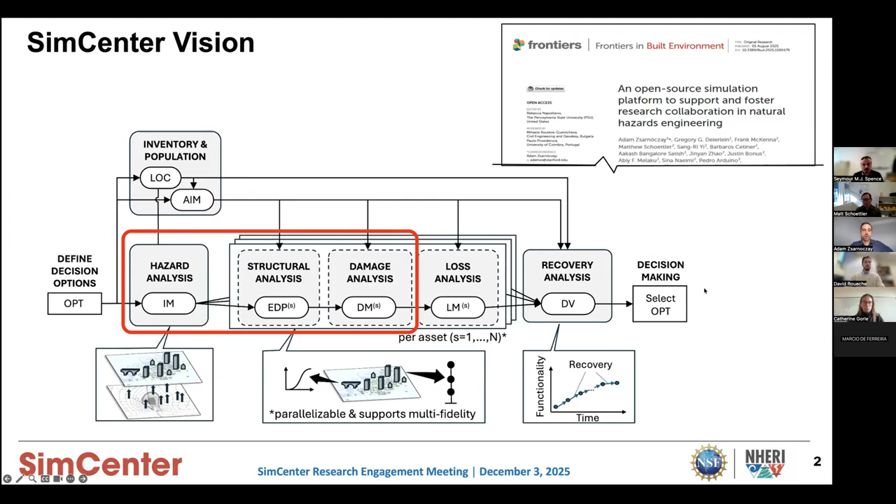So when it comes to this conceptual framework, what we are going to talk about most of the time today is how you can do a hazard description or characterization, then some kind of structural analysis, and in the end, we will also look into damage analysis a little bit. But I want you to understand that there's much more to the SimCenter platform. And if you are interested in these other parts, I encourage you to check out a publication that we had recently and also to talk to us to learn more.

So having this conceptual framework is great, but I think one of the strengths of our simulation platform is that we implemented it in a backend and in several different front-end desktop applications. Our backend is what does the simulations. It's written in C++ and Python, and our front ends are making this accessible to users through graphical user interfaces.

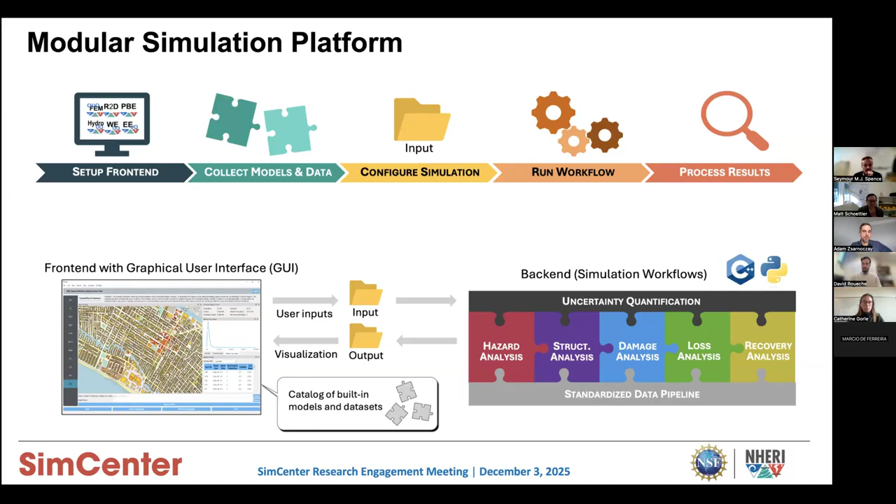We have different front ends for different use cases, and they help you go through the process of running these simulations from the beginning where you just set up the application all the way through configuring the simulation, running the workflow, and then processing and reviewing the results. We provide different levels of complexity for users with different needs. Those who want a streamlined analysis, for example, students who are only getting familiar with wind engineering, have many automations available to them that make it very easy to get something running.

But those who are more like graduate students who want to do research and want to develop new models can go a little deeper, get their hands dirty, and then bring their own models into the platform and make use of the flexibility of this whole architecture and see how their models compare with what was already available, and then make these new models available to the broader community.

We have this complicated figure that I'm not going to go into the details of, but you see that we have figured out how to help users with different needs, and we provide different ways to use our platform for each level. So if you read that publication that I linked earlier, then you will see how this translates into actual use cases, and you will see how it could work for your own research or practical work.

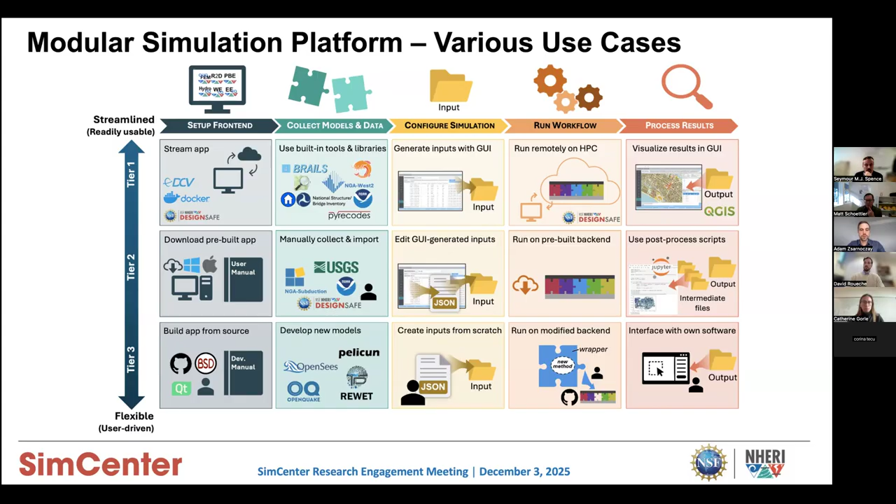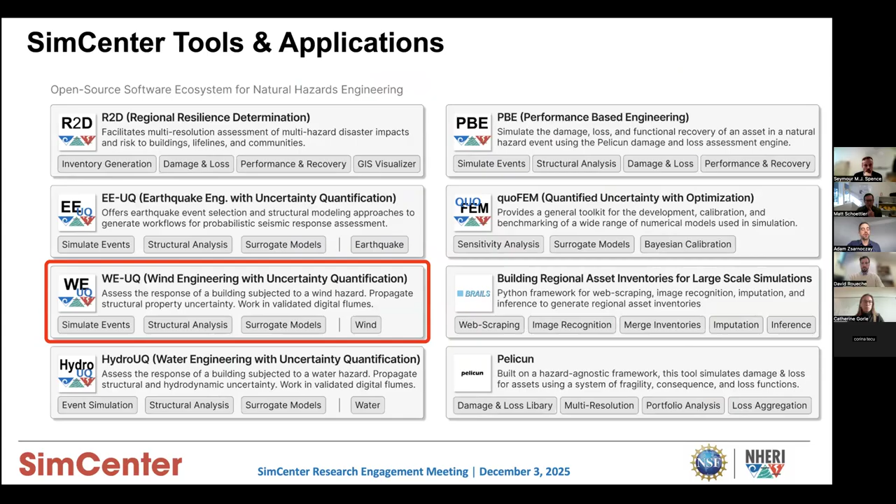Now, when it comes to our desktop applications, we have a different application for each different use case that we identified. I mentioned that earlier. What we will focus on today is WE-UQ, our wind engineering with uncertainty quantification application. I just show this slide to show you that we have other applications for other purposes. So if you are also interested in those kinds of problems, then I encourage you to check out those applications as well.

Now, when it comes to WE-UQ, what we are doing with this is fourfold. First of all, we want to help people get familiar with and we would like to support the education of more wind engineers who are well versed in computational methods. And we envision a new generation of wind engineers who are just as familiar with experimental work as computational methods and use them as complementary tools, and they can get much more done by having these two at their disposal.

Besides computational fluid dynamics based approaches, we also have a bunch of stochastic tools for wind generation and wind pressure generation. And we also support bringing your own experimental data into the tool and using that directly for the calculations. So this covers the wind hazard part. We also have a structural response part in this application. All of our applications give you workflows. So you can step through different modules to get a complicated calculation done with these applications.

So the wind part gives you the wind loading, and then the structural response part allows you to model a structure and apply that wind loading on it, and then see what happens to the structure. We use OpenSees here to model the structural behavior, so it's a finite element method, and we provide a number of different modules that help you create those models and bring existing models into the workflows.

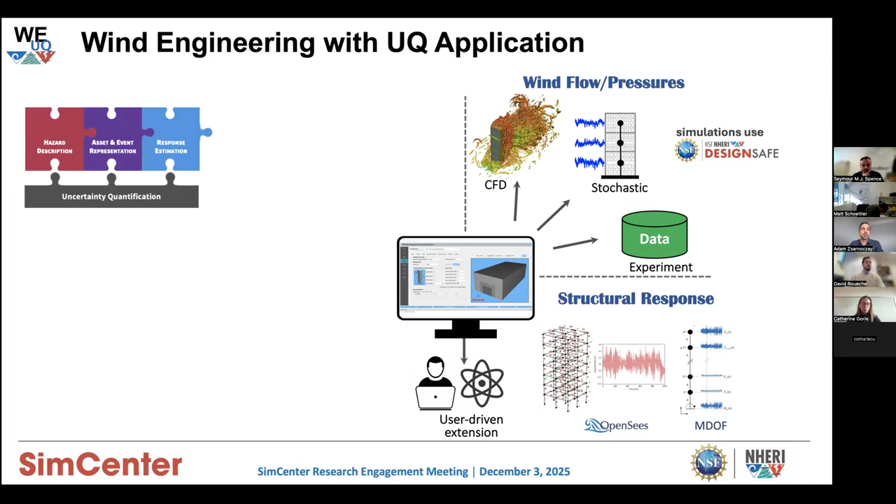Uncertainty quantification is the third part that I wanted to talk about. We don't want these analyses to be just deterministic. We want to help you do probabilistic analysis, either just forward propagating uncertainty or doing more sophisticated things like sensitivity analysis or reliability analysis. All of these are built into the tool and facilitate those kinds of analysis and making them part of your research.

Finally, our most ambitious goal with this is to help you create surrogate models. So once you set up these workflows, you should be able to generate surrogate models that reproduce the expensive calculations and make it much easier to apply the same kind of fidelity to your analysis with a fraction of the computational cost.

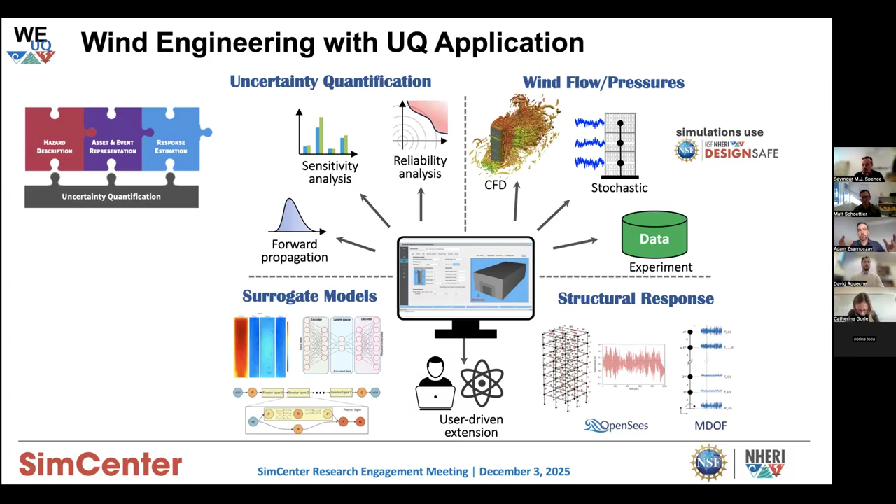So this is what WE-UQ does in a nutshell. And I would like to focus on 4 different use cases next to give you a bit more details about the kind of problems that we see people use WE-UQ for already.

The first one is a relatively simple starting point where people do sensitivity analysis using existing results from aerodynamic databases, such as the database from the Tokyo Polytechnic University. This is bundled with our tool, so you can automatically access those results and then apply uncertainty either on the wind speed or on the structural parameters, and then do a sensitivity analysis to see how that uncertainty translates into the variation in the results.

We have examples for each of these use cases that I'm going to mention. So if you go to the WE-UQ documentation, you can look at those examples where we provide a detailed description and guidance on how to run these problems and what decisions we made when setting up these problems and how you can deviate, what other options you have if you want to run similar problems for your research. So sensitivity analysis is the first.

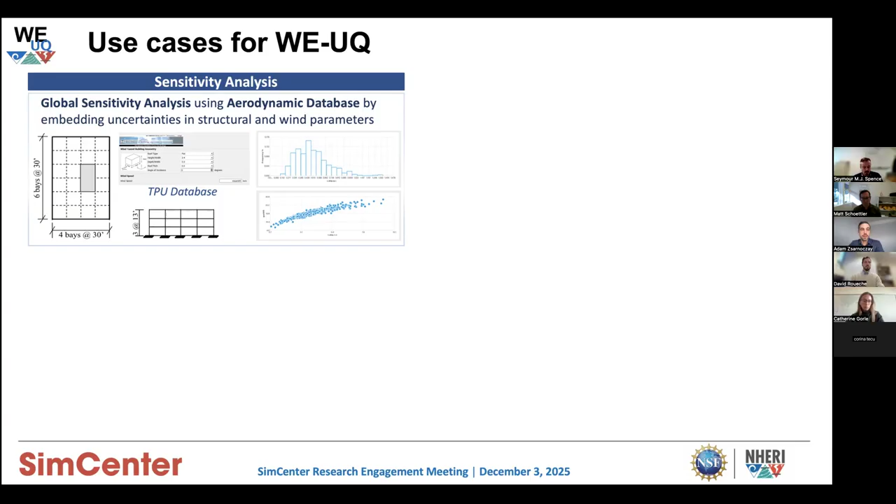The second one that I will talk a little bit more about is creating digital twins, either digital twins of wind tunnels or digital twins of buildings in the wild where you want to reproduce the wind field around existing structures. Let me go a little bit deeper into this.

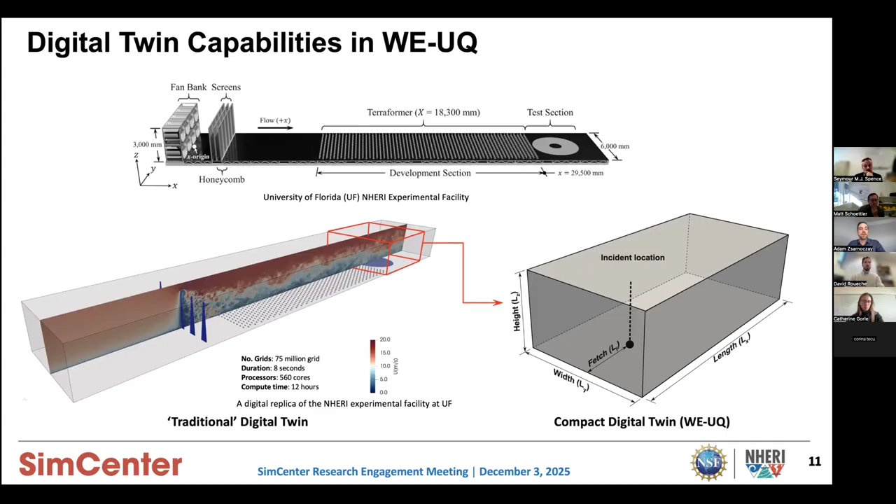Here are the steps that we use to create these digital twins, and we provide you help and guidance through the desktop application to go through these steps and to make the right decisions. It is not completely automated. I have to give you that caveat. You have to know what you're doing. So I would say this is an educational tool.

If you use it within the scope of a class, for example, where you are being taught how to do computational fluid dynamics type simulations, it will help you by taking away the coding and the scripting that you would need to do with OpenFOAM, and it helps you just focus on the decisions that you need to make and seeing how those decisions translate to differences in the results. So it helps, but you need to be somewhat familiar with the concepts and with the theory.

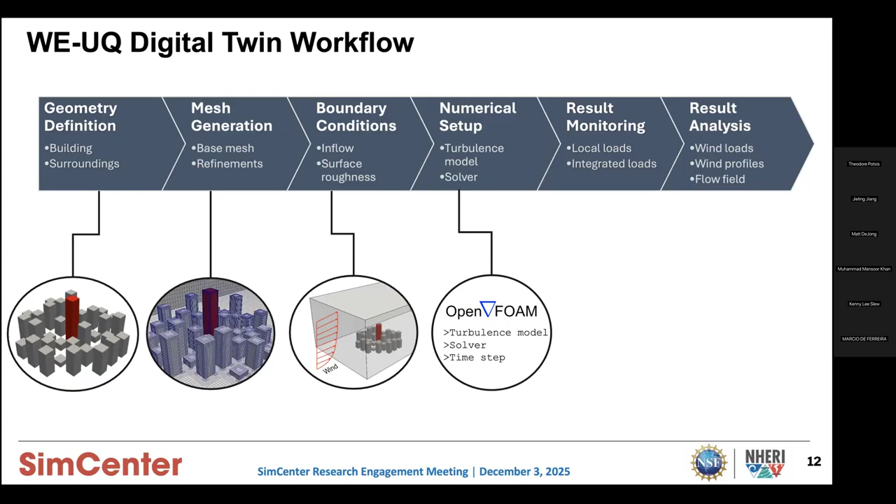Now, what are the steps? First, you need to define the geometry of the building that you're looking at. Then you need to generate a mesh for that and the domain. You need to set up boundary conditions, how the wind is entering that space. You need to set up the numerical solver and the turbulence model, and then decide which points you are going to monitor throughout the analysis. In the end, you get the flow field.

And also, as I mentioned earlier, WE-UQ connects this immediately to a structural analysis. So once you have the wind available, you can also get structural behavior available in terms of drifts or accelerations in the structure, which is pretty powerful.

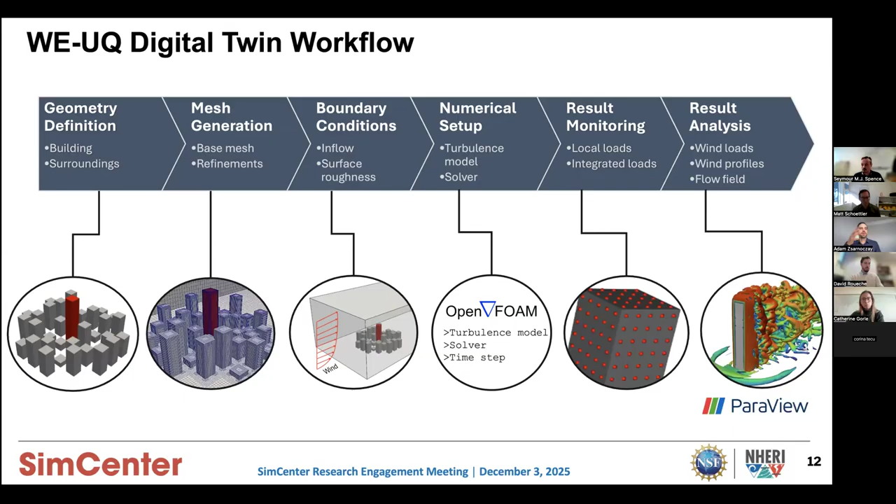So what does this look like in the user interface? Because I can show you a really nice slide, but I also want to show you how this actually looks when you are running an example. So I'm showing you how this looks when we run example 6, where we are looking at the Willis Tower in Chicago as an example, and we are simulating the wind flow around it.

You can do this by downloading WE-UQ today, and the example is available right there. You can load that example and run this problem. So it's available to all of you.

This first screenshot shows how our applications are structured. On the left, this is all of our desktop applications. We have each step of the workflow available, and you can see that we walk through general information, simulation model, event information. This is the wind field or wind generation.

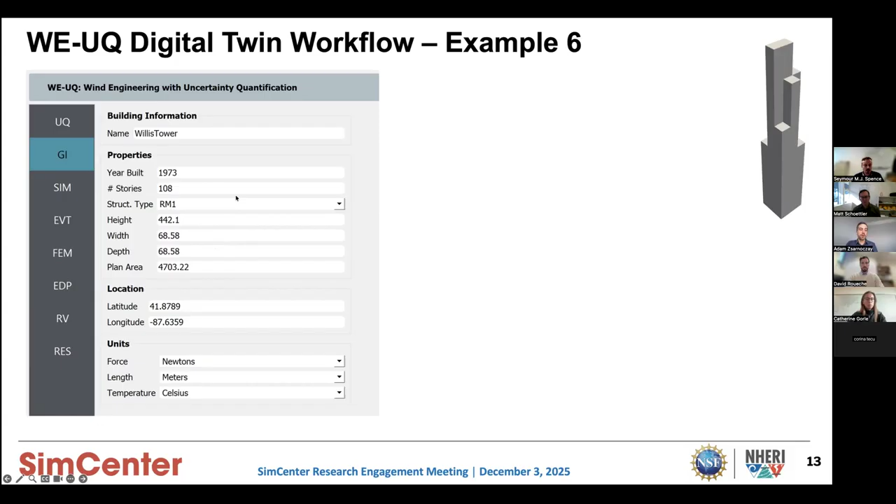Then finite element modeling, engineering demand parameters, what kind of information you need about the building, and random variables and results. So that's the general layout of every desktop application we have. And what I'm going to focus on is the event part.

So first, we can use a single multi-degree of freedom stick model for the building for the sake of simplicity. In this example, it's 108 stories, so it's 108 masses in that multi-degree of freedom model.

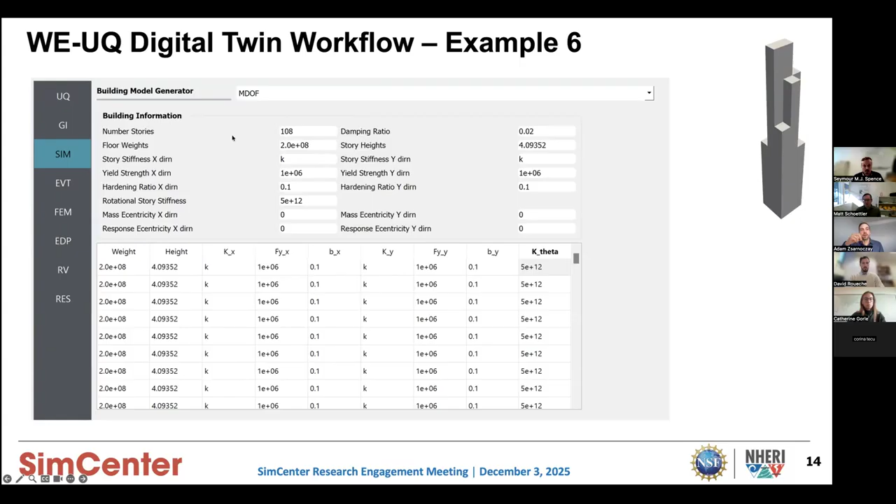And then in the event part, we have multiple options, but in this case, I'm showing you the CFD option, just to give you a flavor of how this looks like. When you are running a CFD simulation, you can see that we have a number of tabs here that walk you through the exact same steps that I showed you in the slide before. I'm not going to go into the details here because we don't have time for that in this presentation.

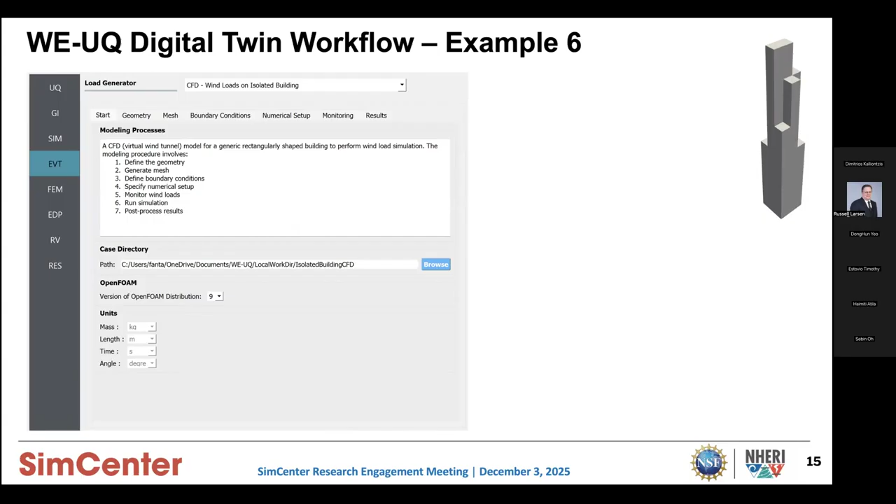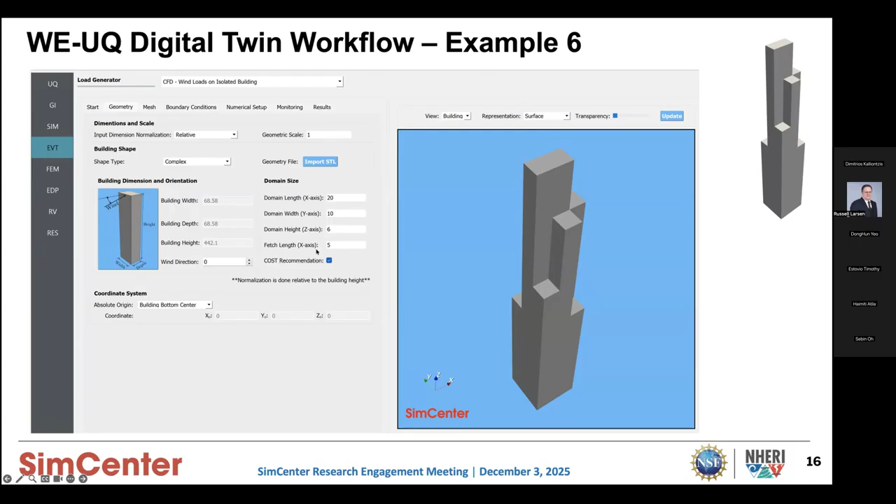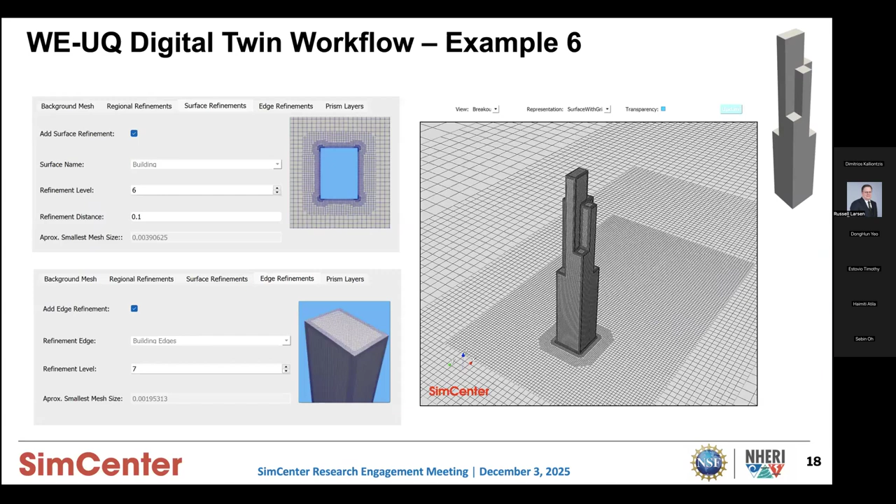So after starting, you can load the geometry. It looks like this. You can see that there's a bunch of settings available to fine-tune what you do here. Then meshing is probably the most involved part of this, where you have to make quite a lot of decisions. So after setting up a background mesh, you have to do a number of steps to refine that mesh. Just to give you an idea, we provide you ways to do surface refinements, edge refinements, and so on. And in the end, you are able to generate something like this within the tool. So it's semi-automated. You have to make those decisions, but the generation is done automatically in the background by connecting to the appropriate tools that take care of this.

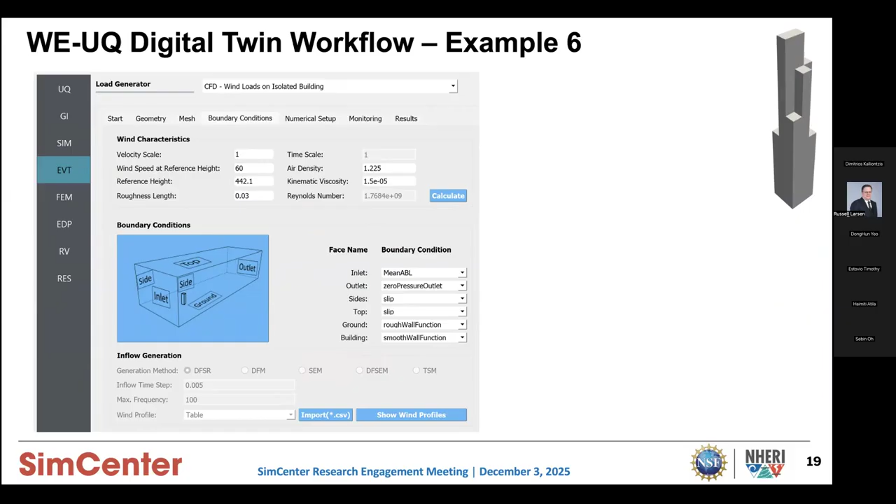Then boundary conditions is next, where you set up how the wind enters this space and leaves this space. Again, you have a number of choices here, including our turbulent inflow tool, which is also a tool developed by the SimCenter, and it allows you a way to set up complex boundary conditions for these analyses. The numerical setup, as I mentioned, is about picking the solver and making decisions about how to model turbulence. And then you can decide which points to monitor throughout the analysis.

So as you see, we are following the same steps that I mentioned in the previous slide, and you can see the level of complexity of this setup in the tool if you are going through it yourself later, today or whenever you decide to try it.

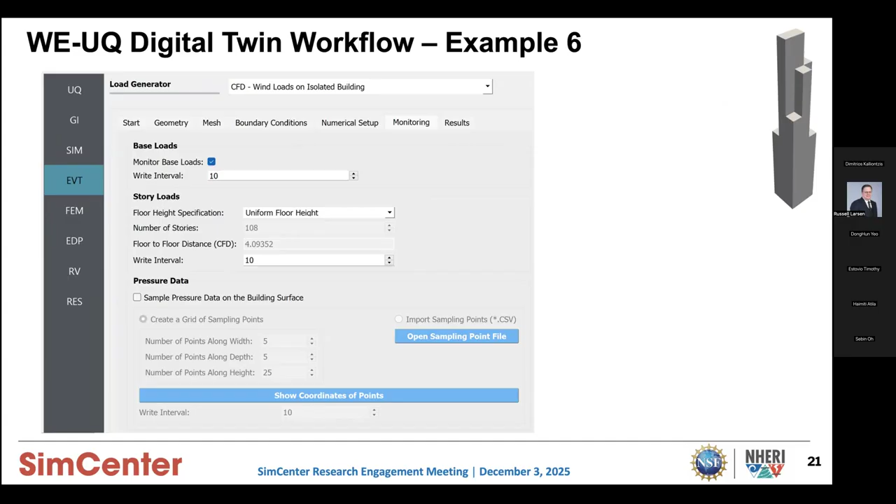After setting up such a workflow, this is also a very important detail, you can run these analyses on the Texas Advanced Computing Center thanks to DesignSafe and thanks to NSF. So the National Science Foundation provides you access to that computing center, and DesignSafe makes it easy to access it. We are collaborating with them so that you can use a click of a button and then send your model there. The analysis is done there, and you can get the results back into WE-UQ on your computer automatically. This is making it very easy and cheap, free, to run computational fluid dynamics analysis and to experiment with these things as a student or as a researcher who's just getting used to how to run these things.

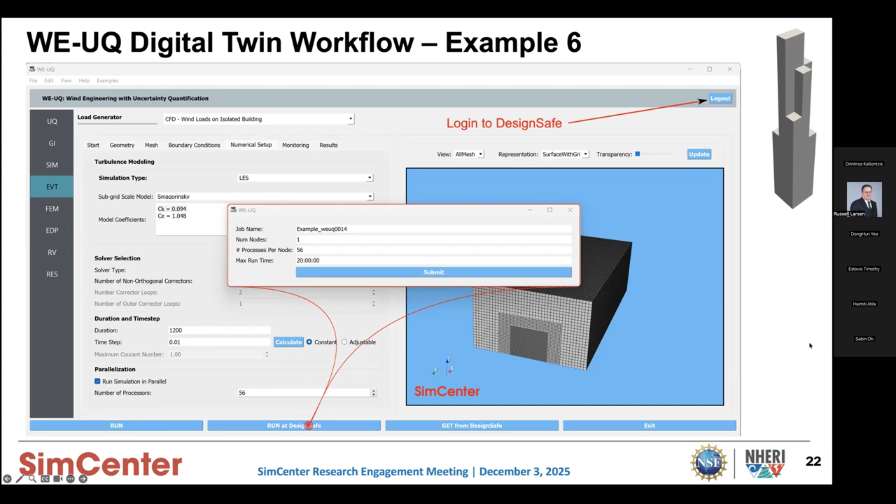All right, so you can run these on DesignSafe, and then when you get the results, WE-UQ provides you an overview of what happens to the building behavior, or the wind speeds. It doesn't give you every detail because we believe that researchers will have many different kinds of questions and post-processing needs. So what we do is we give you access to the raw data and allow you to do your own post-processing afterward.

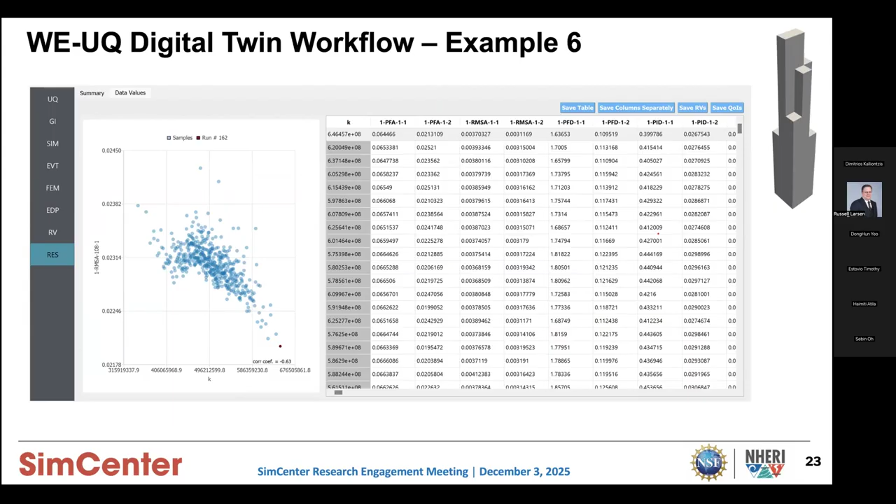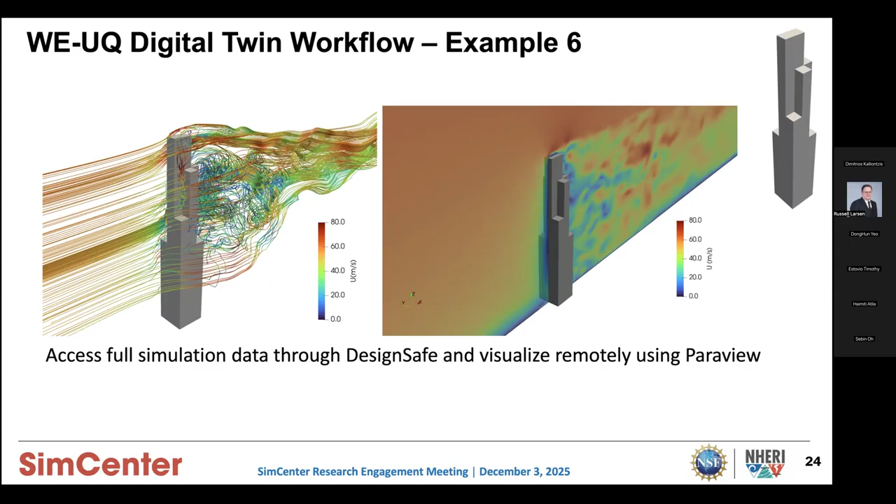One thing you can do, for example, is you can access the full simulation data on DesignSafe and use ParaView to look at the wind flow and use that to confirm if the analysis is doing what you wanted it to do. We did a number of validations.

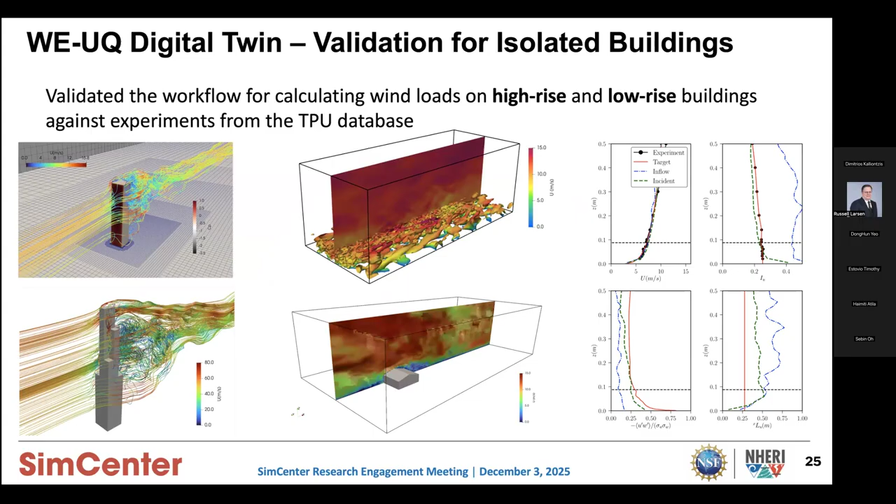So you can see the Willis building right here at the bottom left. We also looked at simple shapes. We looked at low-rise structures. We looked at empty domain simulations, and we compared the simulated results with what was measured at the experiments. Professor Gorlé was a part of this effort, and we did this so that we can be sure that whatever we provide you as a tool is giving reasonable estimates if you set up the analysis properly. And you can see that throughout these examples, we got good results that we found satisfactory. So you can trust that if you know what you're doing, then the tool is going to work as expected.

Now, if you want to move beyond a single building analysis, we also provide you a couple of options.

You can look at a neighborhood scale simulation where you can generate buildings around the building of interest, and you can consider how they affect the wind flow and the wind loads on your building of interest.

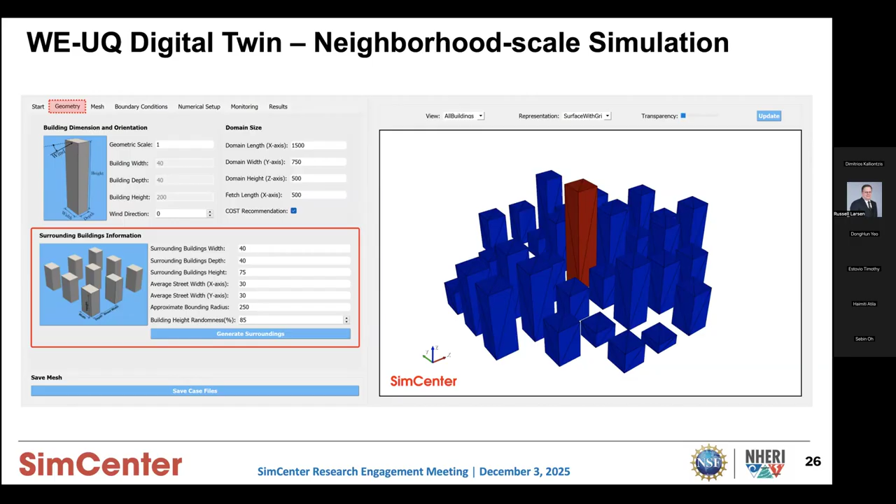So that's one thing you can do, but an even more exciting recent feature developed in collaboration with Professor Spence uses our BRAILS tool, BRAILS++. It's an inventory generation tool. You can pick any region of interest, get the footprints and building heights from that area, and create your domain including all of those buildings automatically.

You can do the usual steps I mentioned earlier, like creating a mesh and all of those, and run a CFD simulation for this domain, considering the actual buildings around your building of interest and how they affect the pressures and wind speeds in that area.

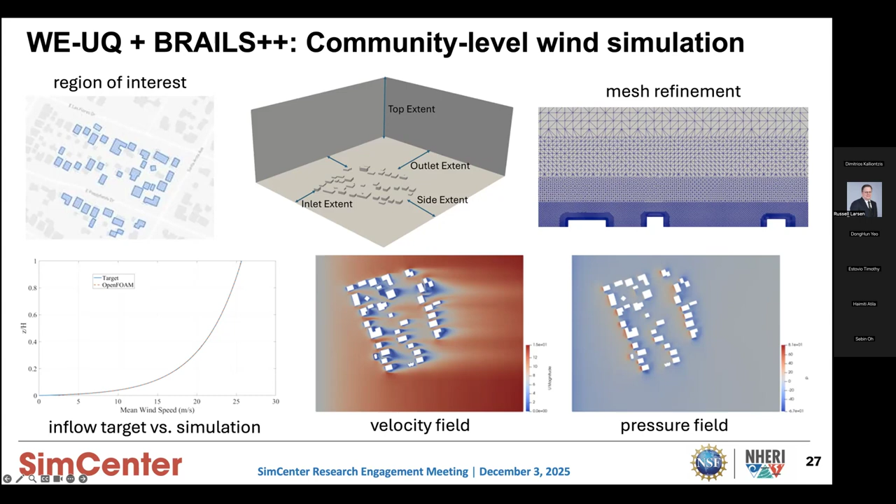This is very promising. It's also quite expensive to do these simulations, as you can imagine. I encourage you to try it. I encourage you to talk to Professor Spence—he's right here if you have any questions. And let us know if you have any suggestions on how to improve these features or make them even more engaging and useful for your research. So this was the CFD part.

There's also another area I wanted to highlight, which is probabilistic assessments using stochastic loading. In this case, you are using experimental data that either measured wind speeds, pressures, or forces. We have these three covered in three different methods, and this is from Professor Spence's group and his co-authors and students.

We are able to create a stochastic loading based on the experimental result that you provide, so that you can generate multiple realizations of the loading that represents the same kind of wind time history. This is very powerful when you want to do probabilistic analysis and only have a handful or only one result that you could work with otherwise.

So again, this is a nice way to illustrate how experimental data and computational methods can be complementary and can support each other.

Finally, I want to spend a minute on performance-based wind engineering. We can generate complex wind loads and then couple them with complex structural models. It doesn't have to be a stick model—you can bring your own OpenSees model that could have various kinds of nonlinearities, and you can do a proper nonlinear dynamic analysis on that.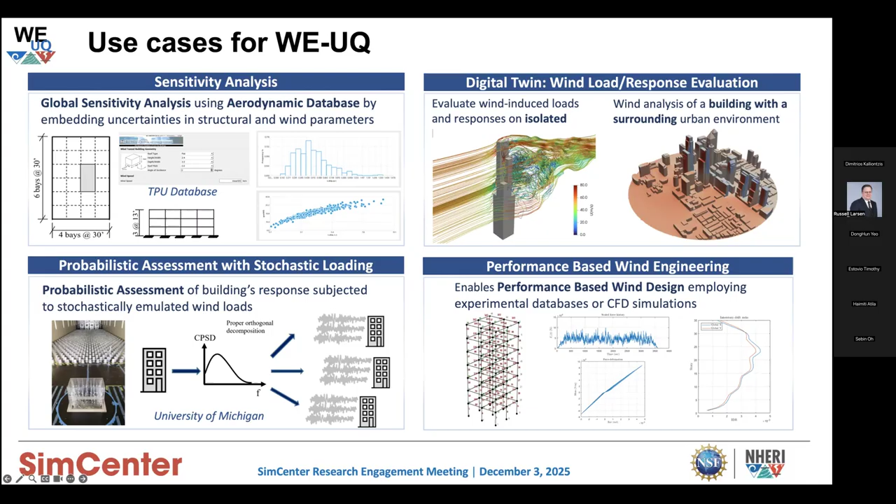Besides looking at what the structure does under wind, how it moves, or what kind of accelerations happen, you can also take a step further. This is also available in WE-UQ, and you can identify areas on the structure that you will be interested in looking at for damage assessment.

So in this example, which is also one of the examples available in WE-UQ, we are looking at a low-rise structure, and we are identifying parts of the roof and the windows. When we do the CFD analysis, we are collecting pressures for those areas. Then WE-UQ can export these pressures in a file that can be used by another tool that we develop at SimCenter.

It's called PBE, that's performance-based engineering. You can import those pressures into PBE and run a damage simulation, considering fragility curves that are specific to those components that you identified—windows, for example, or roof tiles or other important parts of the structure.

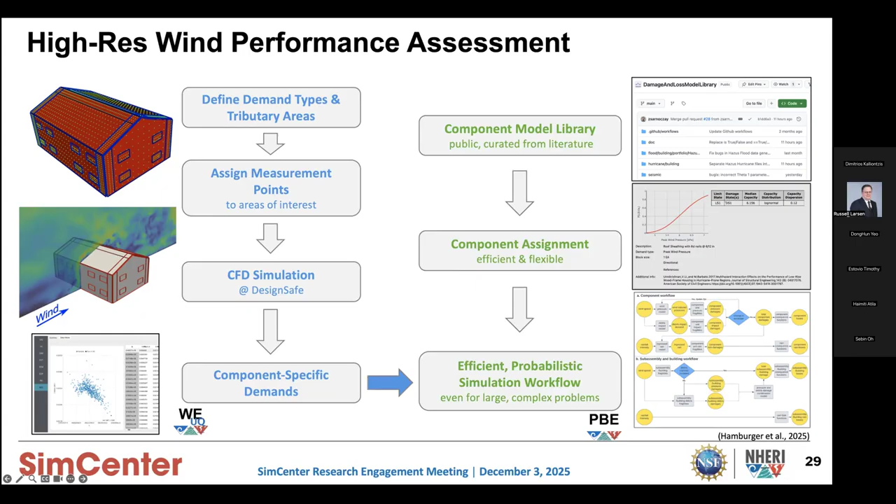So this allows you to do a high fidelity damage assessment of a certain structure and get good information on how each component gets damaged in a probabilistic simulation.

The fragilities used in this type of analysis are also collected and shared by the SimCenter, by looking at what is available in the literature.

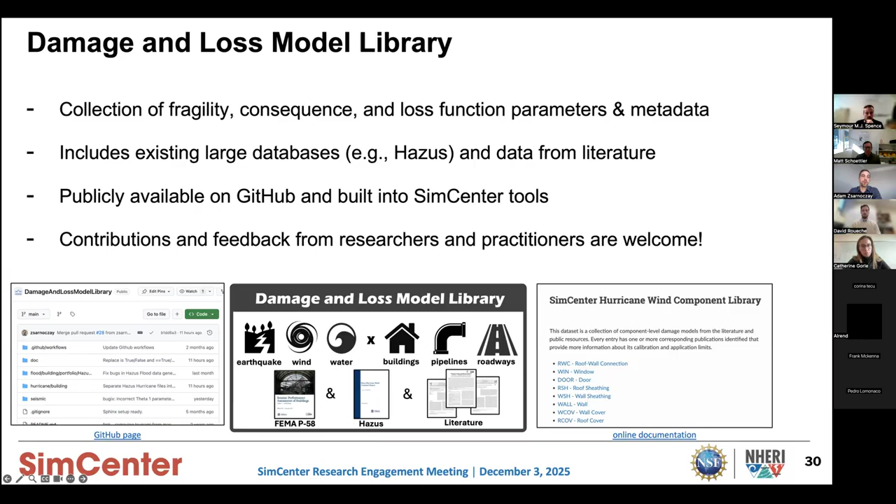So we worked with Rachel Hamburger from the University of Notre Dame, a graduate student there, and Tracy Kijewski-Correa, her advisor. We collected a large number of fragility functions that are available to you and automatically available in PBE, and you can use them to do these types of damage assessments with the help of WE-UQ and the CFD analysis there.

So I would like to close with a vision on how this connects to regional analysis. I've been talking about local type analysis—single building, or single building with its surroundings—where we aim to understand what happens to a building. What we would like is to see how this translates into getting higher fidelity information about the buildings when we do a regional hurricane risk assessment.

The way we see this happening is through multi-fidelity simulations, where each building can be simulated using one of a number of methods. You can choose the method that is appropriate for your building. If you are looking at the Willis Tower, you will probably want to do a high fidelity, specific, detailed simulation.

But if you are looking at low-rise structures, you might be okay with a surrogate model that is calibrated to the high fidelity simulations, but you don't need to bring those specific CFD analysis into the regional risk assessment.

So we see this as an opportunity to connect the local scale detailed analysis to a regional scale risk assessment. We can do this with R2D, our tool for regional risk simulation, which connects everything from hazards to recovery. It's multi-hazard, it supports multiple types of assets, and you can bring multiple types of fidelity into this tool. Check it out if you are interested.

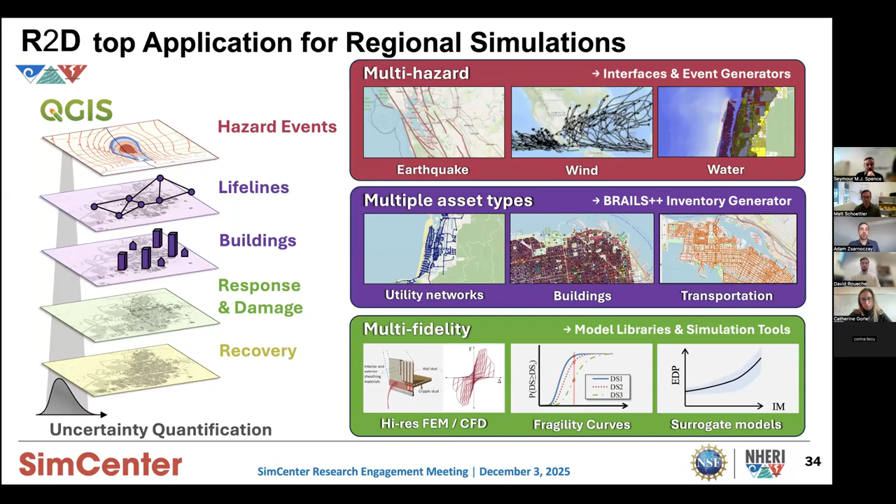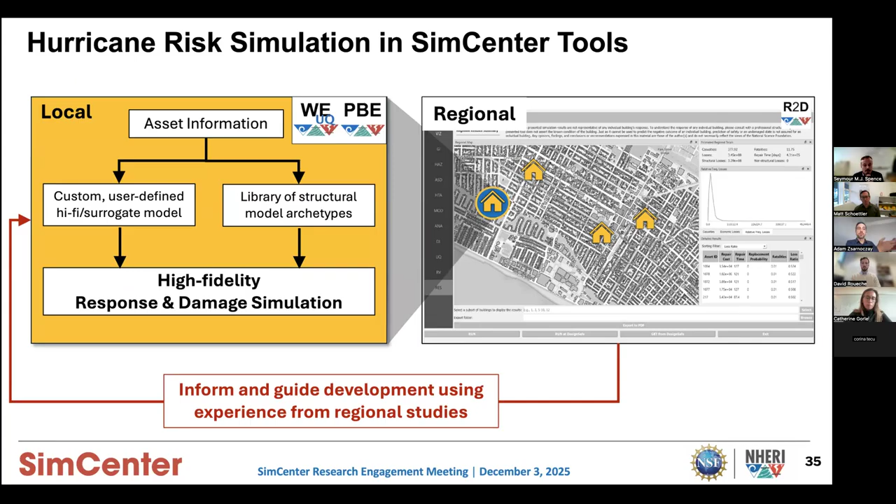And if you run these in R2D, what we hope is that there will be a feedback loop for experimentalists, for computational simulation experts, which tells them what are the needs in regional risk assessment that need to be served by improving the methods for local analysis.

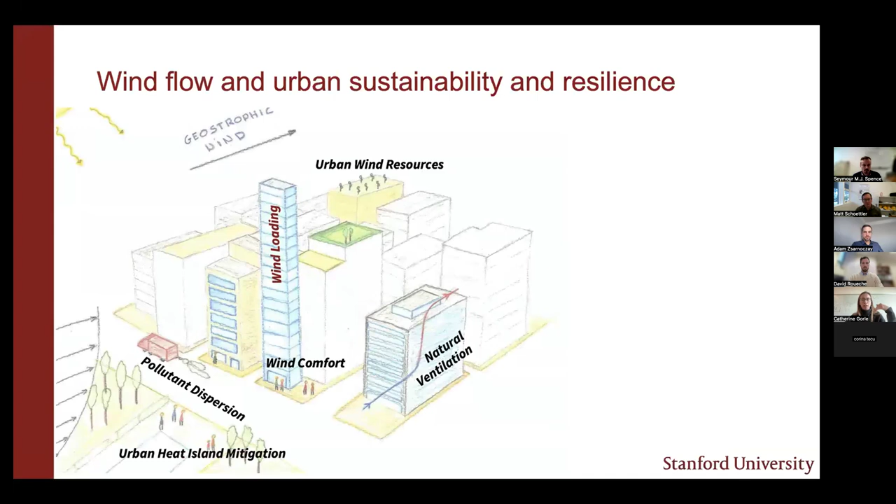I'm going to skip the motivation in the interest of time, because I think if you're here, you already care about this problem, right? So we're just making the case for why CFD can be a good addition to traditional building codes and standards and wind tunnel tests for getting wind loads.

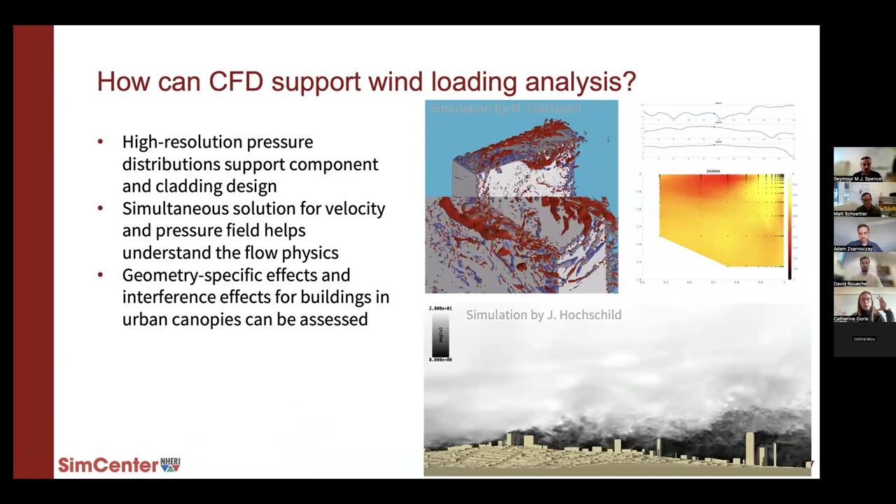Showing some initial flow visualizations to indicate how velocity fields relate to pressure fields, which is really one of the strengths of CFD, right? You get that simultaneous set of information to do flow analysis. We can also do simulations that cover much bigger areas than what we would typically do in a wind tunnel.

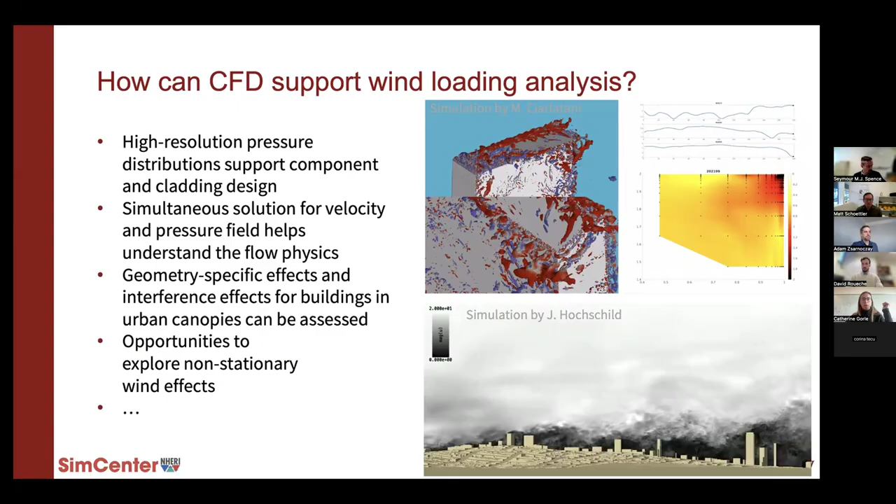There's lots of opportunities to explore non-stationary wind effects. We're not discussing those in the module, but it's worthwhile highlighting that. And then, of course, yeah, lots of other things that could be thought of.

So this is the important part. Now, what are the steps in setting up a computational model that can affect your solution? Really, the first thing is to decide what it is that you want to predict and what is the system of interest—so what are your quantities of interest? This refers back to some of the things that Adam was saying.

The question here is, are you looking at overall base forces and moments, for example, or do you want very detailed cladding loads on the structure? That is going to determine how fine your grid resolution has to be, for example.

Then the physical processes and the relative importance, since we're focused on wind loads, these are kind of consistent, right, across all the simulations that will run, but it's important to create that understanding so that people know what is important in the simulation setup. And then the geometrical characterization, the modeling of the buildings and the surroundings.

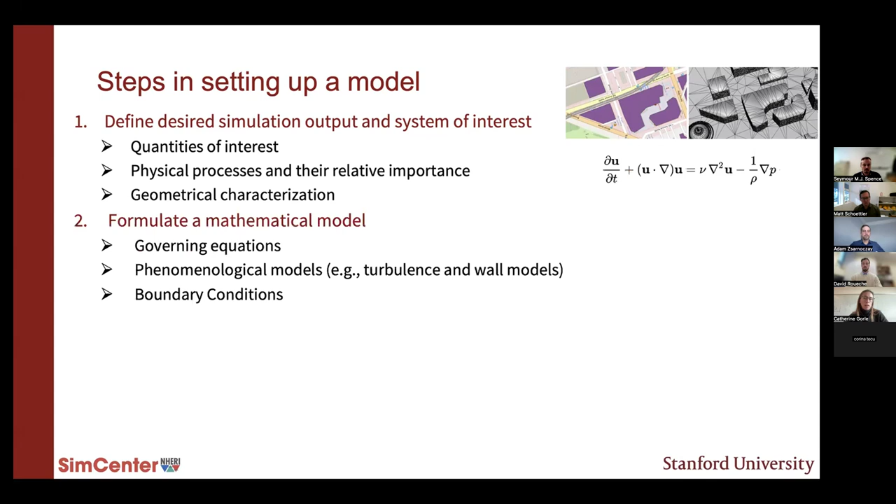Once you have done that, you need to turn that into a mathematical model, right? So that's your governing equations. We're going to solve the filtered Navier-Stokes equations here. So we're doing large eddy simulations. That requires some phenomenological modeling. We need a subgrid turbulence model. We're most likely going to need a wall model as well. And we need to define boundary conditions.

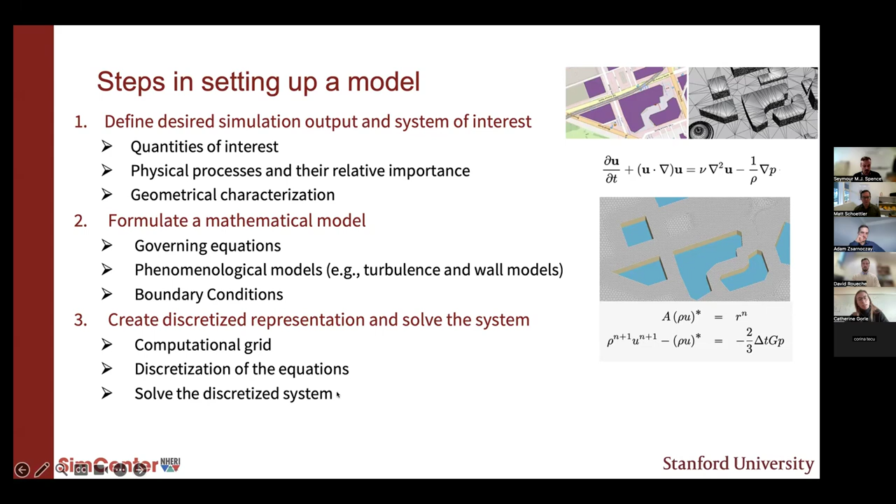Then in the third step, you need to discretize that continuous set of equations, right? Your partial differential equations into a discrete representation. So you have to create a computational grid, you have to discretize your equation, and you have to solve that discretized system. And then last, you're going to analyze your results and do quality assurance.

And throughout this process, right, there's a number of simplifications and assumptions that you're making that can affect the predictive accuracy. And the goal of this module is really to provide background on all of these and to identify the steps that are really key in ensuring that you get good predictions at the end.

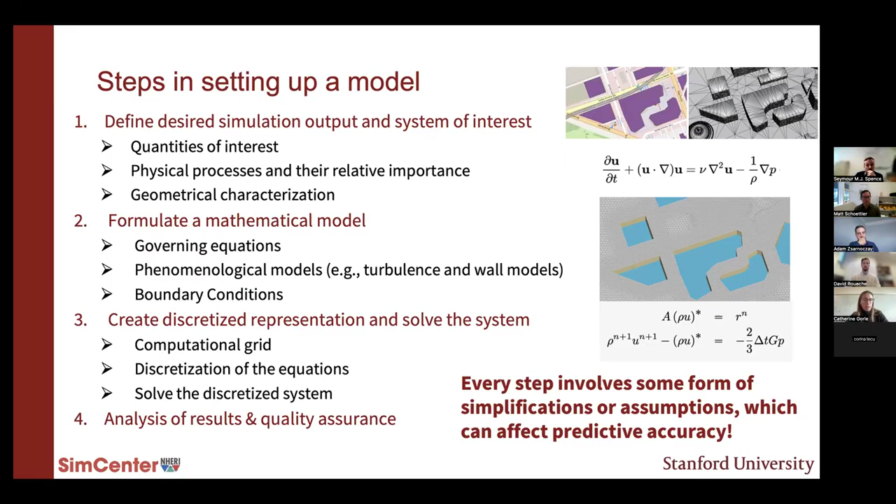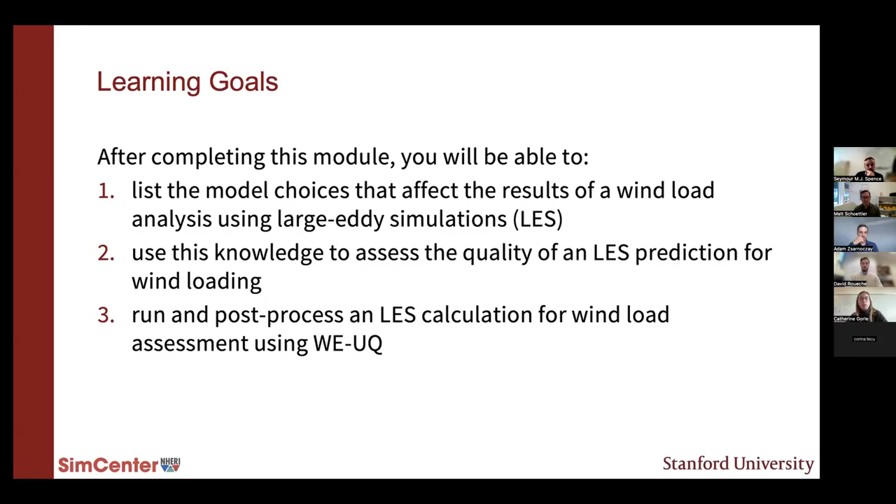So the learning goals are that after completing the module, your students will be able to list the model choices that affect the results of a wind loading analysis using large eddy simulations. They can use the knowledge to assess the quality of an LES prediction of wind loading. And they can run and post-process an LES calculation for wind load assessment using WE-UQ as well, using the tutorials.

So the overview of the module really follows those 4 steps. So in the second slide deck, we talk a lot about the wind loading flow physics, the quantities of interest for wind loading analysis, and then how to characterize the geometry. In the next slide deck, we cover the governing equations. We talk about subgrid turbulence modeling and about wall modeling, and then about the boundary conditions. So inlet, outlet, sides, top, etc.

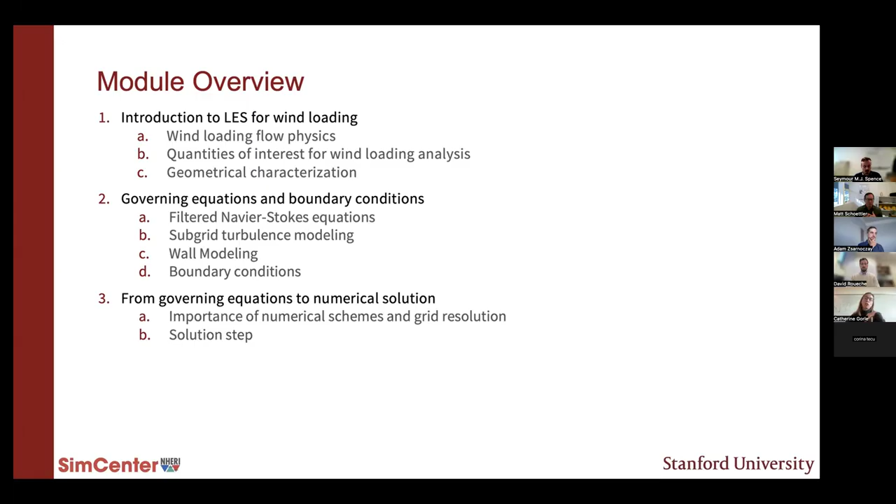In the fourth slide deck, we go from the governing equations to the numerical solution. So we illustrate the importance of the numerical schemes using a very simple example of what a truncation error is. We show the effect of grid resolution on the results, and then we discuss the solution step and what is important to look at when you use iterative solution methods.

And then lastly, the last slide deck looks at the calculation of statistics based on the simulation data. And it talks, maybe most importantly of everything here, about verification, validation, and then quality assurance of your results.

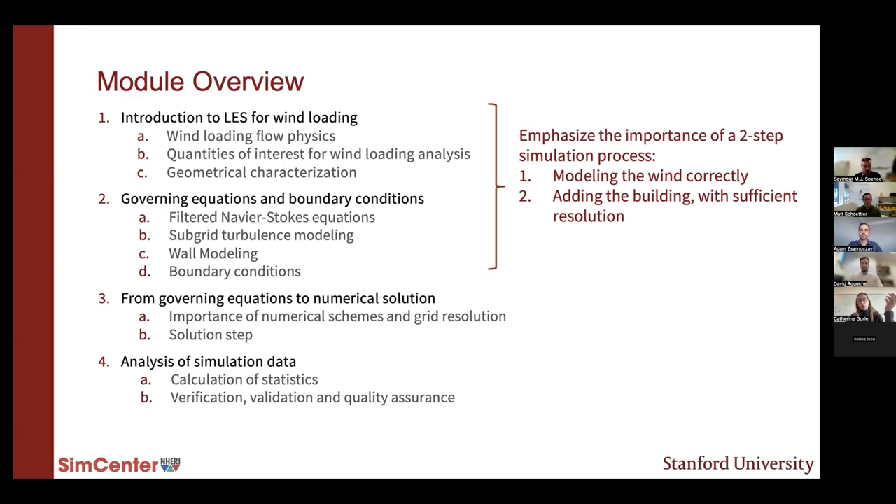And the key point here is really in these first two steps, we're going to emphasize the importance of using a two-step simulation process, where in the first step, you're going to make sure that you correctly model the wind. So you do a simulation without a building. It's just an empty wind tunnel case, if you want to call it that. And you make sure that the wind characteristics that you get at the location where you want to put your building next are okay. And then next you add the building and you make sure that you have enough resolution. And when you do these two things, you can really make sure that you get quality assured simulation results. So that's the emphasis throughout.

The tutorial follows those two steps. So the first tutorial is going to show you how to model an atmospheric boundary layer flow using large eddy simulations. And in the second tutorial, you're adding the building into that domain and you learn how to obtain forces and wind pressures. And then the assignment focuses on grid sensitivity to really reinforce that importance of grid resolution in wind loading calculations.

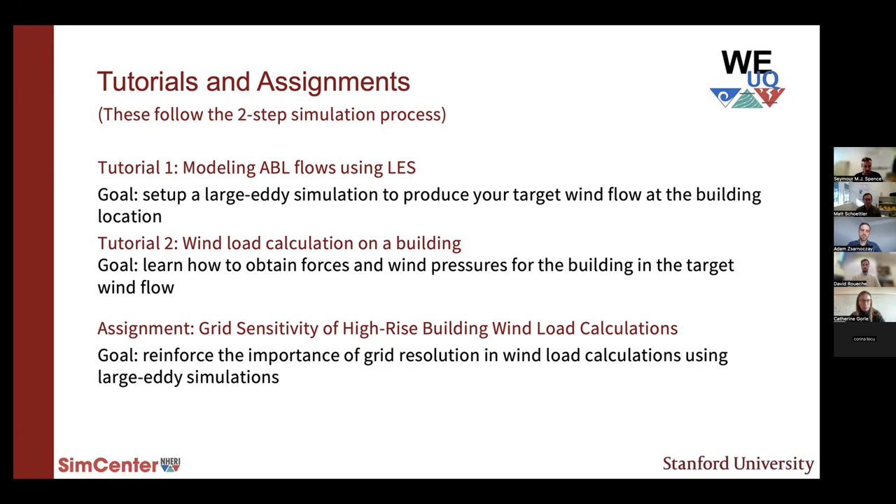At the end of each of these little sections, I have a little quiz that you can just ask the students right after teaching it to kind of test if they retain the key concepts.

Okay, the synergy with the ASCE pre-standard. So first I want to acknowledge that that's definitely not just me. There's a lot of people that have worked on this for quite a long time now and put in a lot of effort. We have people from industry, from some of the main wind engineering companies, CPP, RWDI, there's Thornton Tomasetti, Ramboll, Arup represented. And then we have people from industry as well. SOM is here too. We have a peer review team that has been looking through different drafts that we've generated and has been giving feedback.

So what does that standard look like? So we have two chapters that are more introduction, general computational wind engineering. But then the main meat of this document is really all things that are being touched on in the educational module. So chapter 3 talks about wind climate and characterization of wind flow conditions. We touch on that very briefly in the second slide deck. Then we have general simulation requirements, wind flow simulation, and building aerodynamic simulation.

And these are really the key components of how do you do these LES simulations? What do you need to do to make sure that your results are going to be accurate? And importantly, this really outlines that two-step simulation process that we are emphasizing in the educational module as well. So the standard is going to require that you do these two steps in the simulation process and make sure that you demonstrate through acceptance criteria that first you're modeling the wind accurately, and that second you have enough resolution to resolve the turbulent structures that are important around the building.